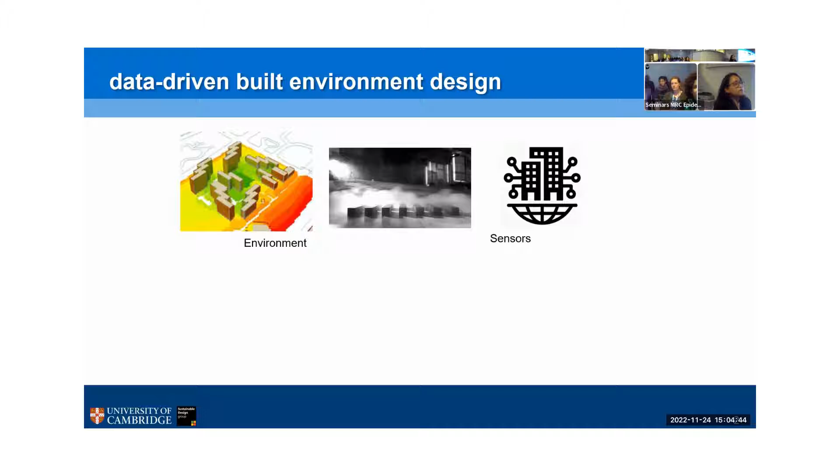You'll find me installing sensors across buildings, across built environments. I also do a lot of experimental modeling, and here you can see a little bit of airflow modeling happening. Apart from that, I also collect a lot of data from people as occupants about their practices, about their perceptions of health, about their well-being. I mainly work on health, like incidence of disease, rather than well-being as an indicator, but I'll also share a little bit of my work on that.

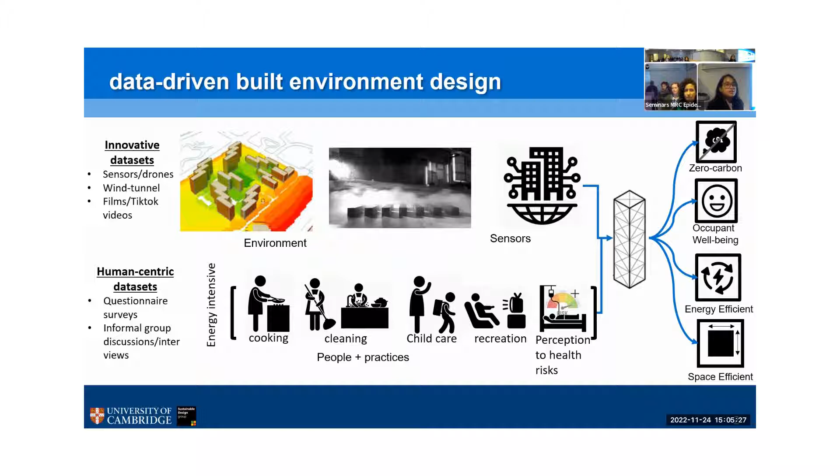So when I say I work with this, I combine all of these sorts of data to respond to our urgent goals of climate and energy efficiency that we require, as and when we are also responding to occupant well-being. When I talk about data, I basically use a whole lot of data which can be both quantitative and qualitative, and sometimes very innovative forms like films and TikTok videos are also part of my data set. That's where I try to convert design into a policy framework.

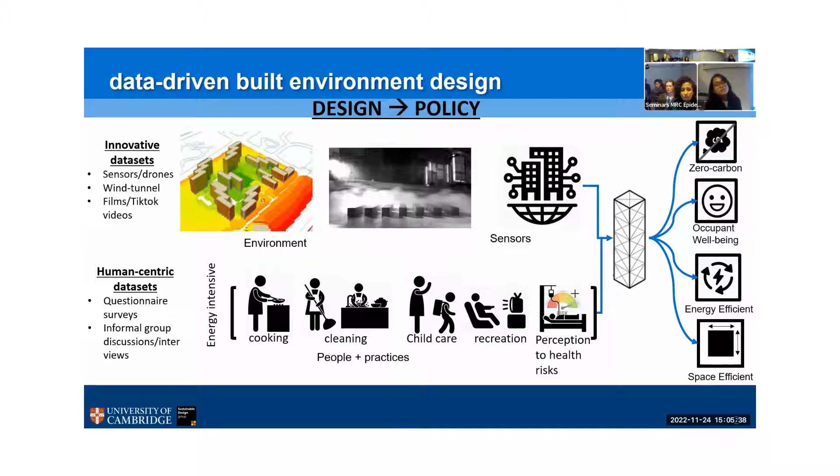And that brings me to my research group, the Sustainable Design Group, where we work on these four verticals of sustainable development goals: health, energy, a little bit on gender equality, and overall on the sustainability of built environments. And this is what our group's mission is.

We also have a few members here and a few joining online, where we work on the three nodes of the triangle. Most of our works have at least two of the nodes, where we combine these to develop sustainable design. And by sustainable, we also mean it's a healthy built environment that we are designing.

Given that I see design as a solution, most of the time when I look at data, I'm trying to look at outliers rather than the normal curve. By that, I basically want to see why an outlier exists in that particular pattern. So I'm more interested in looking at data which exists in isolation within a different pattern in a neighborhood.

Broadly, these are the keywords you'll find in all my publications. Talking about urbanization tensions, that's where the whole stem of sustainability research comes in. We need to have a huge amount of shelter and housing that will come up in the next decade, and a large amount of built environment will be coming up. As per the UN, 3 billion people will require affordable housing and a better built environment.

That has connotations to energy and health, but however, we can use these feedback loops to generate better design so that they have positive impacts on health.

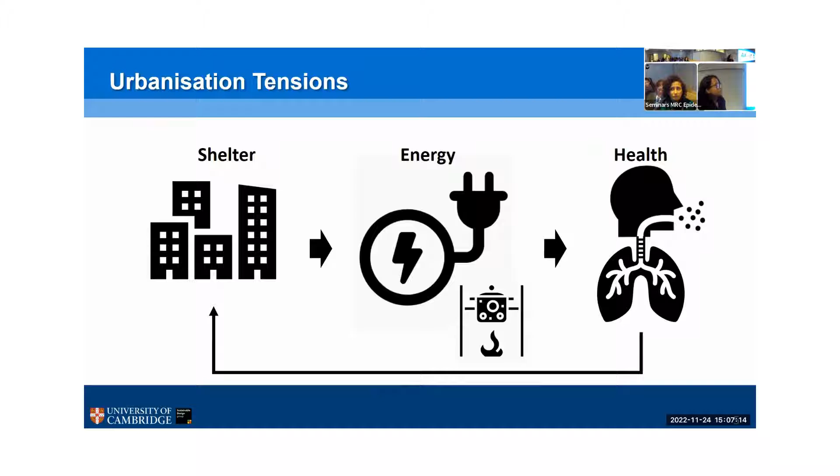So first, let's guess the distance between King's College and Fitzwilliams. How many of you think it's half a kilometer? Which branch of Fitzwilliams? One just down the road, yes, on Trumpington Street.

I launch the poll so people can vote and we'll be able to see. Once you can, I've launched the poll so you can now vote. If you think the distance to Fitzbillies is 0.5 kilometer, vote for it.

And we'll do it for up to more than at least another 15 seconds, and then we can stop it.

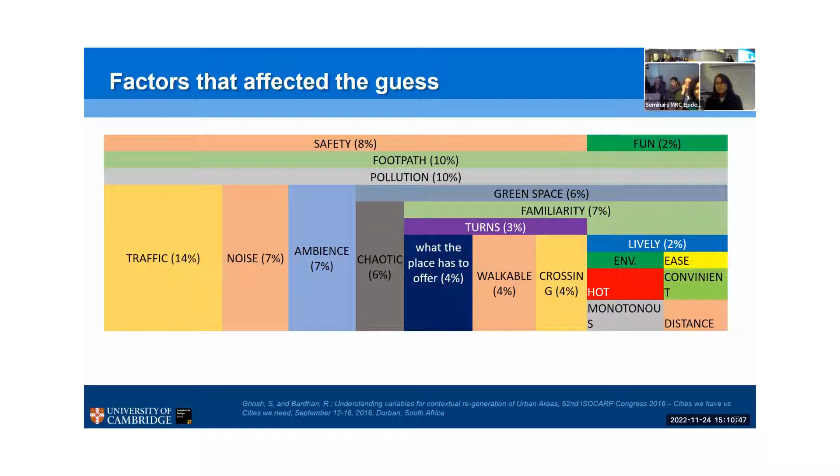And then we found out people actually guess the distance before they start walking or decide to walk on a particular street. And that estimation is not just a numerical estimation—they are estimating based on a wide range of variables that they take into account.

If I have to group them together, the majority, 41%, cited traffic-related variables, like it's very crowded or there's not a large amount of traffic. There's also a high percentage, nearly 49% of the population, who felt the variables were related to urban form—meaning the way the houses, buildings, roads, trees, or water bodies are laid out helps us decide where we will walk.

So whenever we are doing walkability research, we often lay a lot of emphasis on hard infrastructure and also on distance—so we say 30-minute cities, or 1 kilometer, 15-minute cities. But wherever we actually see where people choose to walk, it's probably not the distance, it's probably what's lying ahead.

So when we look at desirability to walk, we see these kinds of variables coming up a lot in our—I don't know, it's just, it's not working.

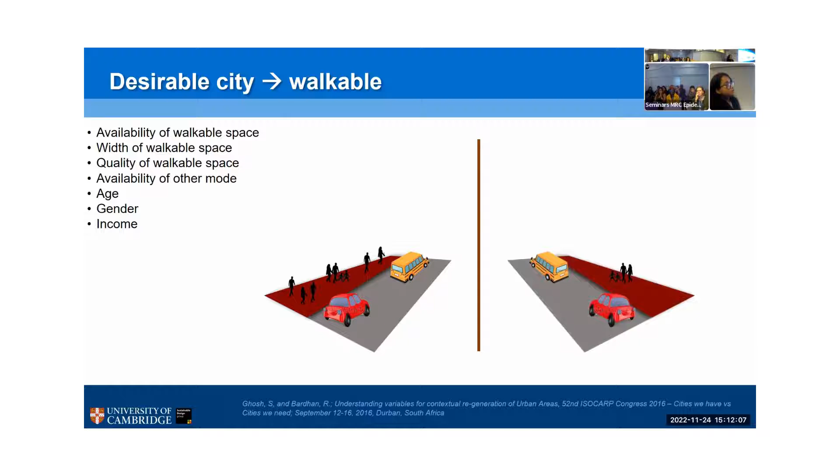No, it's not working. But however, imagine it's the same road with similar walkability, width of the walkable space, and quality of walkable space—we have two similar roads. However, what they differ in is what lies on that road: the physical infrastructure in terms of urban form, urban structures, or the buildings, if I may say.

So there is definitely climate, which plays a very important role in whether you decide to walk or not. The other part is culture—culturally, multiple cities have shown that it's the culture of walking that makes people choose to walk on a particular street or not.

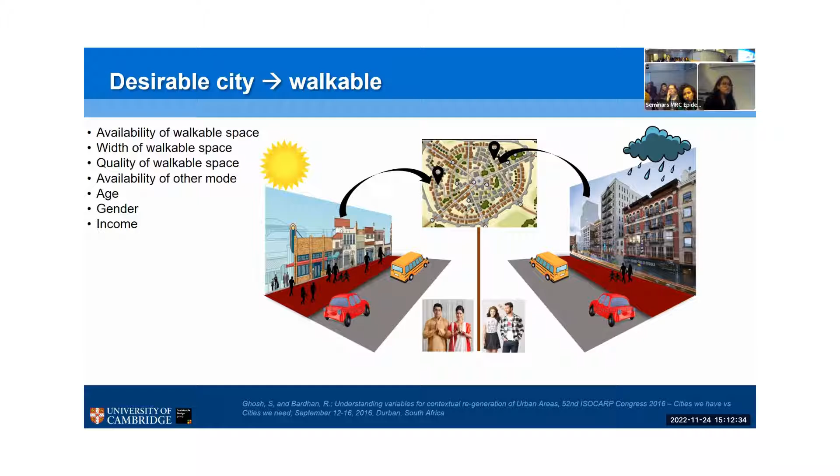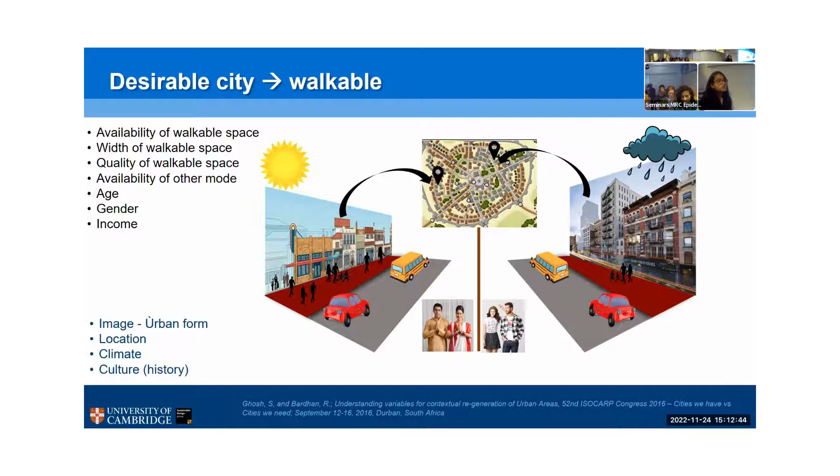And that's why we started looking at whether the image of a city, of a particular street, or the location, or the climate, or the culture, or history makes them walk more, or choose to walk more.

So what we did was we chose a city where 31% of the population actually walk to most of their destinations, and only 2% of the population use a car.

That kind of comes up with the question. So what we did was we selected 8 different places in the city with different sorts of walkability, in the sense that we started looking at very qualitative indicators. And we did a very mass survey.

That means a large number of people were actually walking. Then we looked at a range of these sort of intangible emotions that get evoked when people walk on the streets, and we found chaotic and boring.

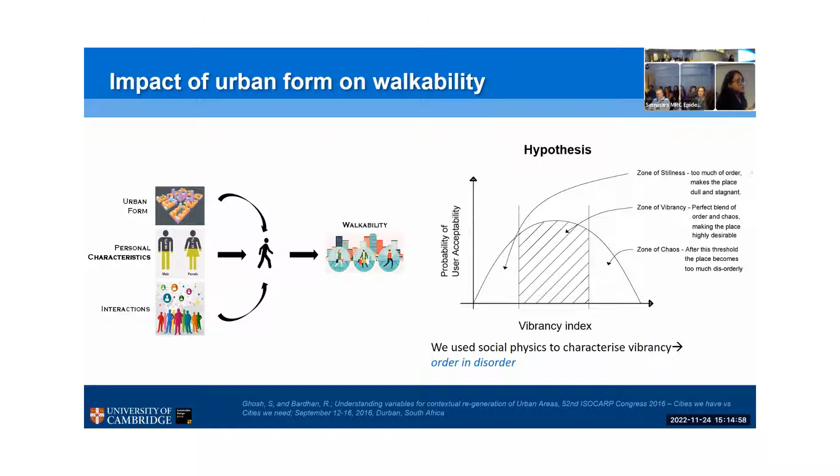It is directly borrowed from the Brownian motion theory, where we see how many people are actually walking on a street and how many interactions they're having. And we tested that using those 8 streets.

So we started—yeah, that's fine. So we tested that, and based on our videographic evidence and based on our attractive points—why people would walk on a street—in a moment we will see small little people coming out, which is the origin of the agents. Each of these buildings are attracting points: some are coffee shops, and so on. These attraction probabilities were derived from our survey data.

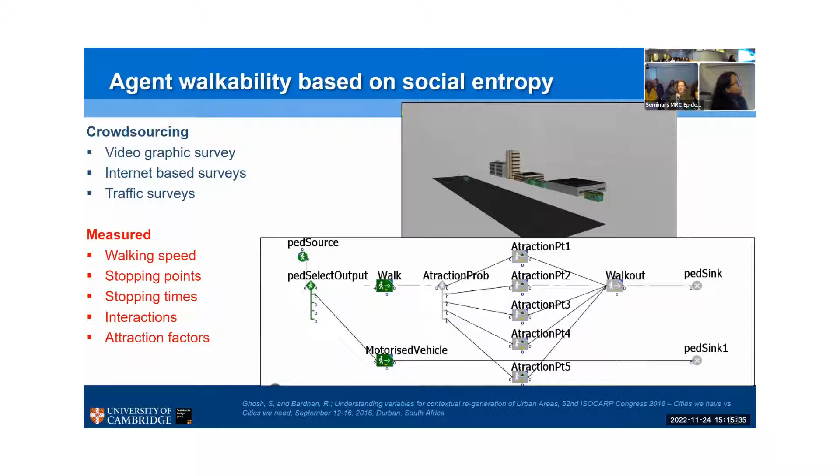And then we classified the streets based on their vibrancy and their probability of walking. We saw that it actually fits our model: there were some streets along these lines which were very still, where walkability was lower and the probability of walking also was relatively lower. Whereas in some streets, like Gariahat and Burrabazar which I showed, people did not find it pleasant to walk on those streets.

So it gives a notion that people walk on those streets because there is no availability of any other means of transport—if there was another option, they would have chosen the alternative. Whereas in Gariahat, people actually get down from their cars and walk on the streets because of the vibrancy, the amount of attraction points, or the diversity they get in those streets.

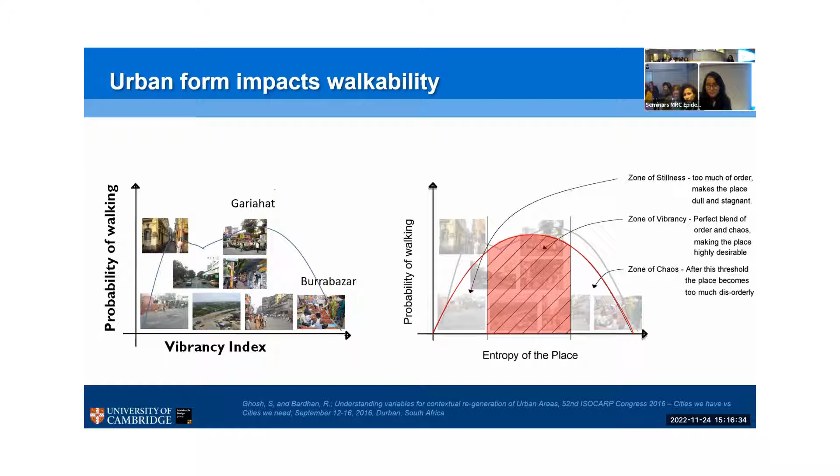That brings us to a question: in a setting where each of these urban forms has a different thermal signature, can we actually understand if heat affects their walkability? So we started looking at urban form from a very broad perspective, from a satellite image, and we see in a city where 3 different typologies of built forms are very closely associated to each other.

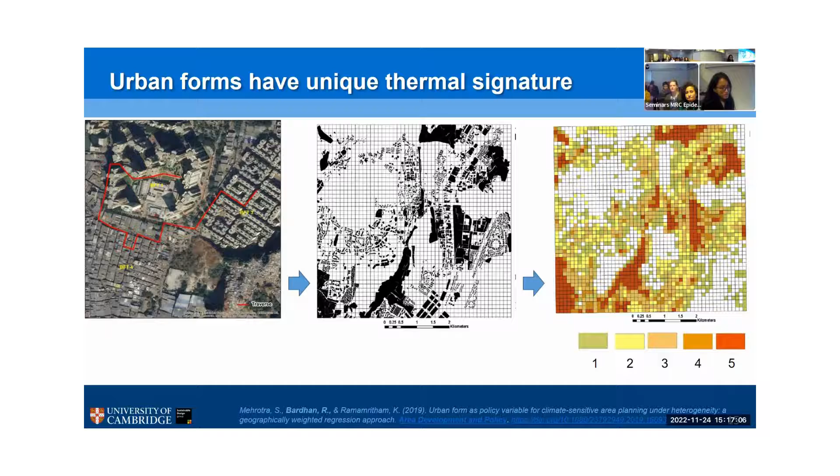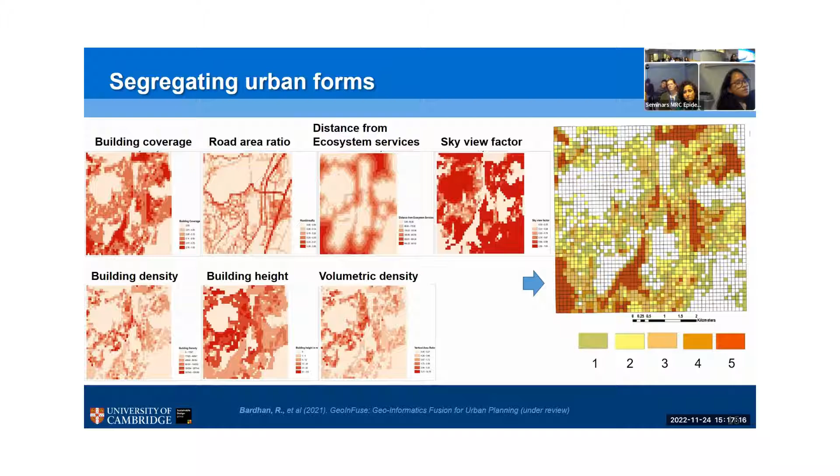Our endeavor was to find out the unique heat signatures of these 3 places. That brought us to develop a multi-metric statistical analysis, which we developed so we could significantly segregate the urban forms based on their heat signatures. We did that using machine learning—we developed a machine learning framework where we could use all of this.

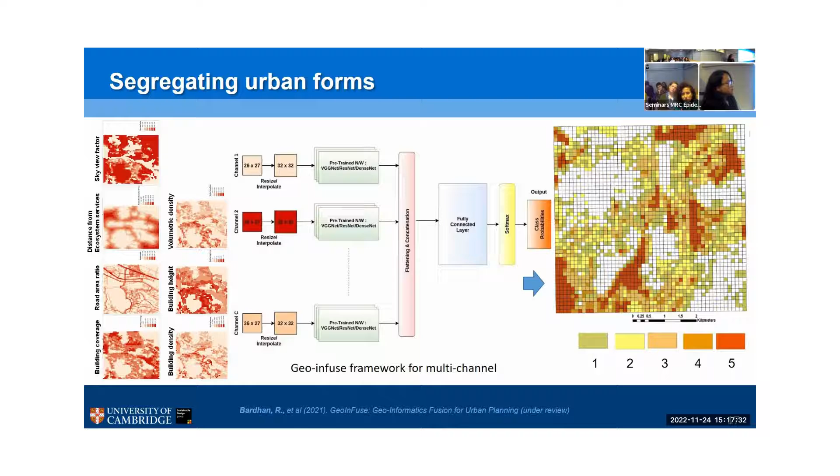Today we had 7 of these channels of information. You can actually add more, and we could successfully segregate these forms. These forms had very different signatures of temperature, and I will show you how they look like.

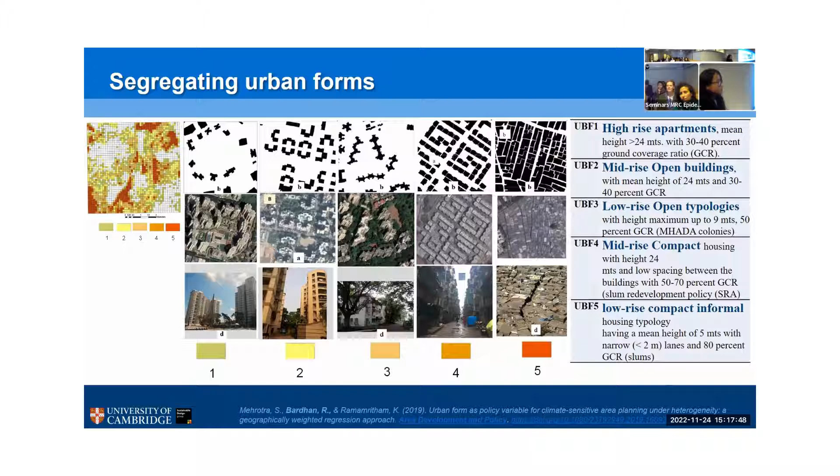That brings us—so we installed sensors, and that brought us to a very large data set. We installed sensors for a longer time, correcting for seasonal differences and local weather conditions, to get the microclimate. Our endeavor was to find out if there is a particular form in a city that allows it to cool down faster, because every form is going to heat up—it's a city where a lot of construction is going on.

So is there a form which cools down faster? Any point below the red line is thermally comfortable, whereas any point above is thermally uncomfortable. We wanted to see if below the red line the curve has a larger area or is longer. You see a particular form keeps cool from 6 o'clock to 10 o'clock in the morning, which is the top form, whereas the other form had a cooling effect for a shorter duration. That means it's actually warmer during the day to walk on those streets.

And when we related this data to our walkability, we found out that the particular form which cools down faster had more people registering to walk or willing to walk on the streets.

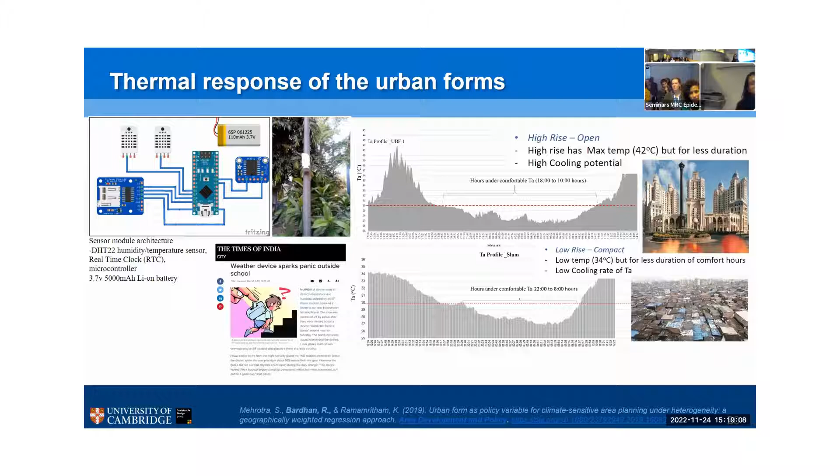This is just a snapshot of what people thought we were installing bombs in the city, and we got featured in the news.

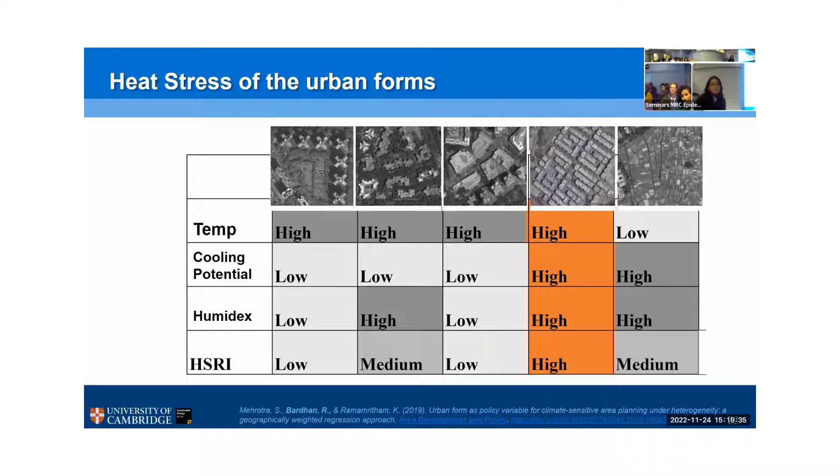So when we looked at the temperature, the cooling potential on the humidex, there was one particular form that was coming up, emerging quite significantly, which had very high temperature, the highest, high cooling potential, very high humidex, and a very, very high overall heat risk index.

Why does this become important? Because moving down the line, a large number of cities will have these sorts of forms, which we just saw had a high heat stress index, because they are the affordable housing coming up across the global south. And that's where the future of urbanites will be living.

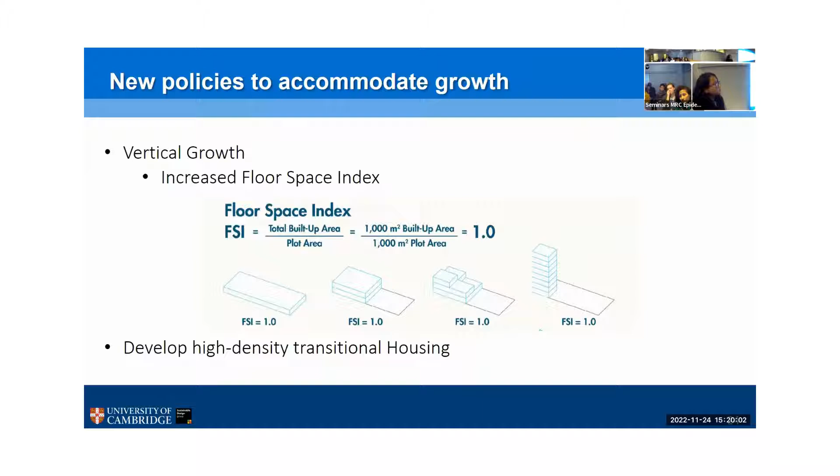This is how it looks like. So they are going to replace all these high heat risk spaces with the highest heat risk space we just saw. This is how it looks. Throughout the city, you will have these sorts of built environments coming up in extreme numbers, nearly to the extent that more than 50% of the population is currently or will be living in these sorts of spaces.

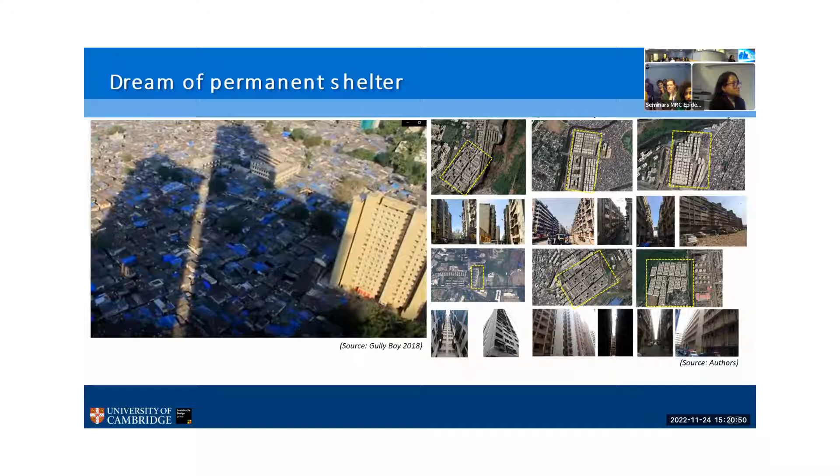That means if these houses are not actually responding to the climate burden, they have a pathway towards health impacts. And how does this work?

It started in 1995, where they cleared a part of the slum area and then started building. If I show you in a picture, this was 2018, where you see the small little building in the middle, that's where people will be transported before the tall tower in the back is constructed.

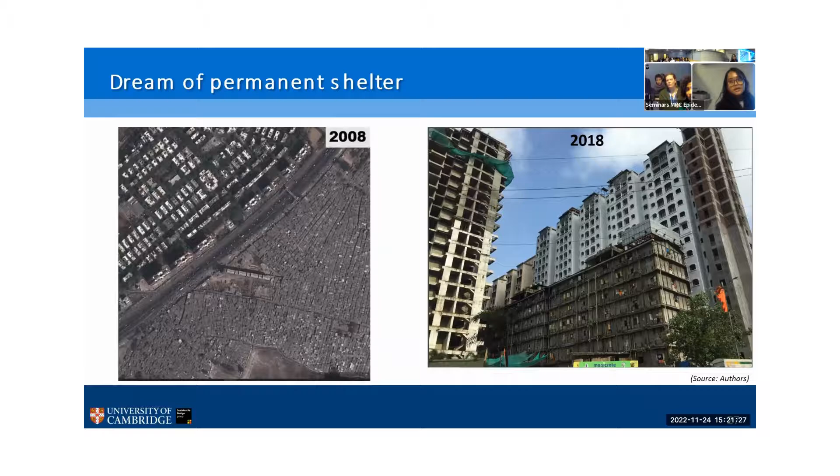Once that is constructed, the rest of the land that gets freed will be used by the developer to build extremely high-end residential buildings, with prices comparable to London or New York, in Mumbai. So it's bought by a very rich population. That's how they are cross-subsidizing and building these sorts of houses.

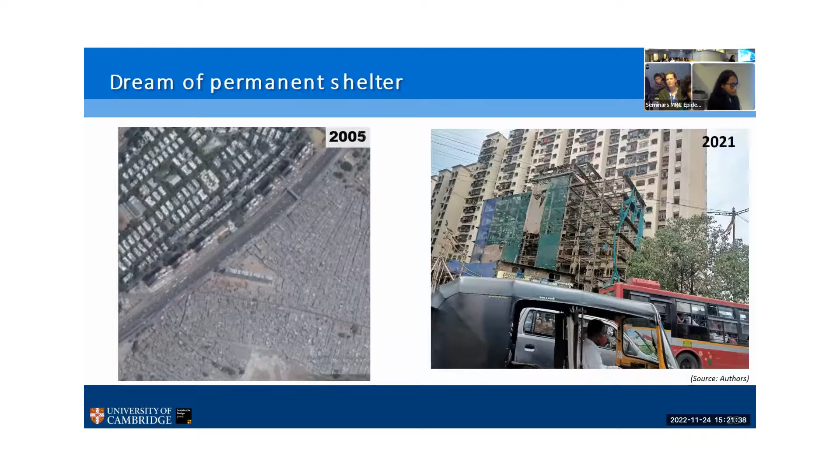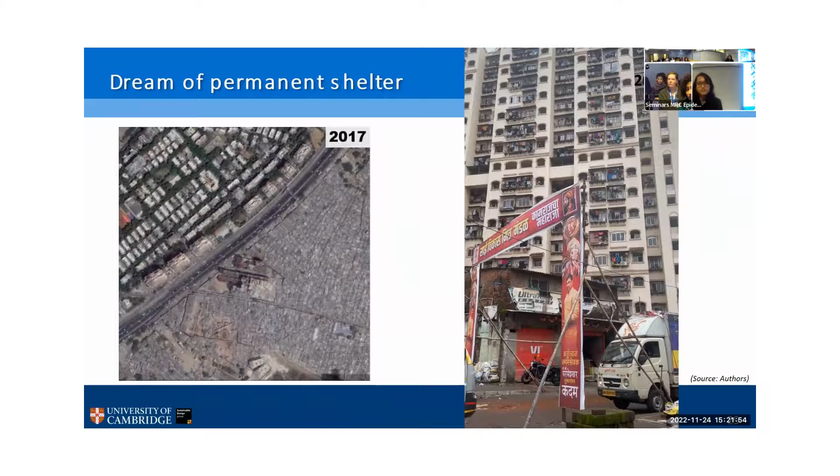That brings us to the question. This is how it looked in 2021. And this year, in August, I went, and this is how it looks now. The high-end residential is built, the people have actually moved in, and you can see the small little transit building is now dismantled, and people have started living in these houses. We started trying to uncover what is the health impact of living in these sorts of houses.

This is a new policy that has come up, which is being copied across the global south because of its huge potential to close the housing deficit. What they are doing is, in a normal building code, they allow for a 45-degree angle, meaning no building should cross the 45-degree line. Whereas for a high-rise building, the maximum you can go is a 63.5-degree line. Beyond that, the law doesn't allow it.

For these special buildings, they have a special code, which means they have not mentioned any sort of height or angle restriction. They have said the distance between the buildings has to be minimum 3 meters, so there's no limit on what should be the maximum. But when you give a developer a minimum guideline, of course the person is following the minimum guideline.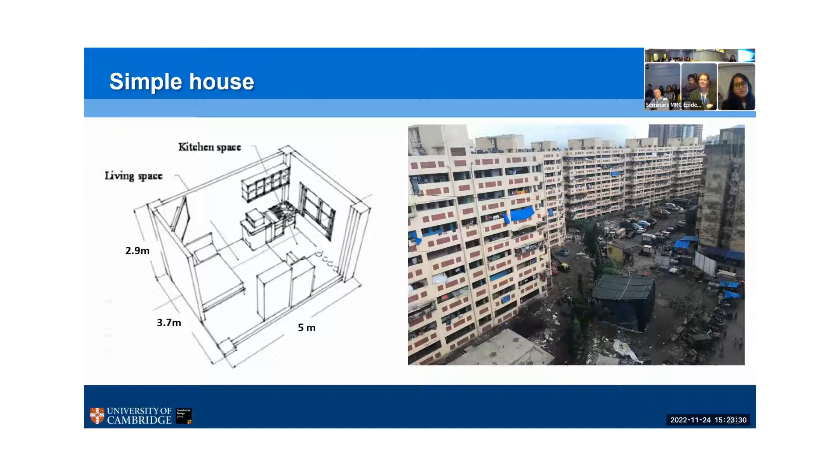This is how it looks like in reality during a monsoon season. These are just units stacked side by side. That brought us to understanding what the inside and the outside actually look like.

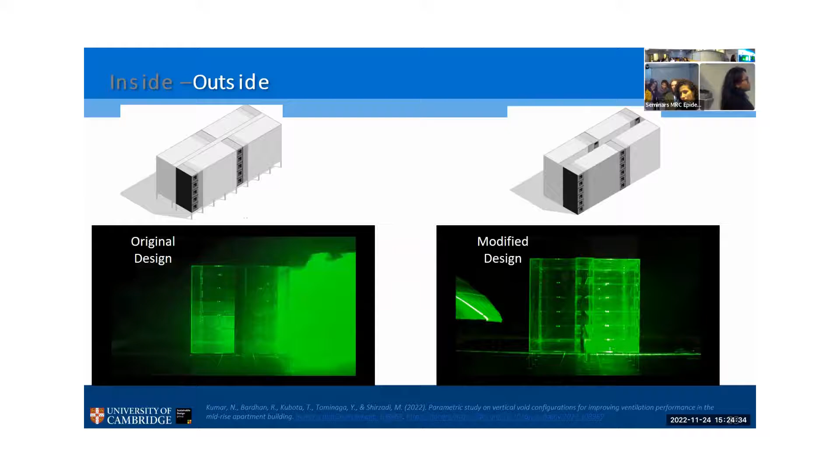So what we started with—this was the original design. When we started looking at it, I'll show you—it's not a storm blowing, it's just a video where the speed was increased. So when air flows, our endeavor is to bring in natural ventilation on the leeward side, apart from the windward side, because the windward side is already getting ventilation. You will see all these units have the ventilation required, whereas these units do not get any ventilation. So we changed that strategy.

So the image got reversed—it should be this. But what we did was we introduced a sort of fin here, which basically drives the air up through this and then turns it around. In that image, you're not seeing any ventilation on the windward side because we closed the window there, but if you open the window, you'll get the ventilation. So both units started getting ventilation.

One other problem we are now trying to solve: because the air travels through the atrium and then goes in, if the atrium is contaminated, you're going to breathe contaminated air. So for the natural ventilation, we are trying to solve that part now.

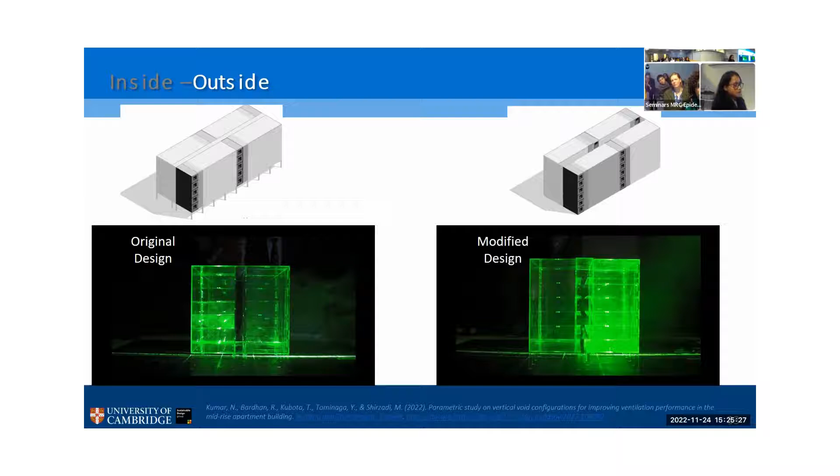At this point, the problem also arises of how these buildings are actually looking in reality, and this is how the windows look. When we talk to the architect, they say they are providing a 1 meter by 1 meter window, whereas in reality, because of the lack of space and the huge family sizes, everything overflows into the corridor.

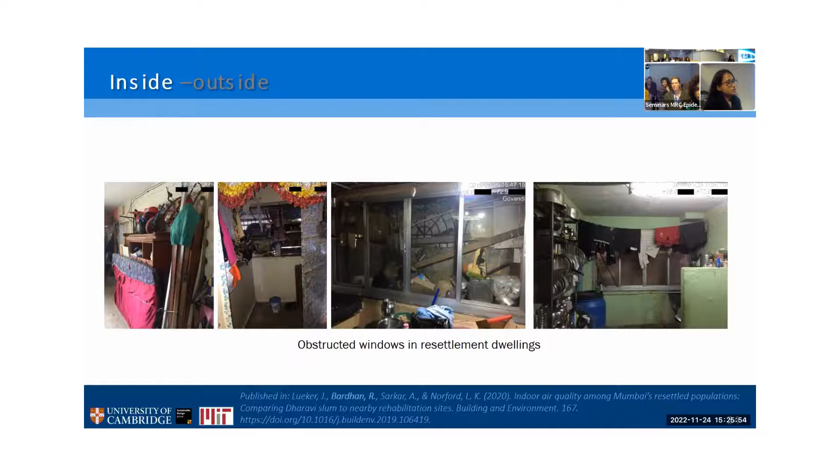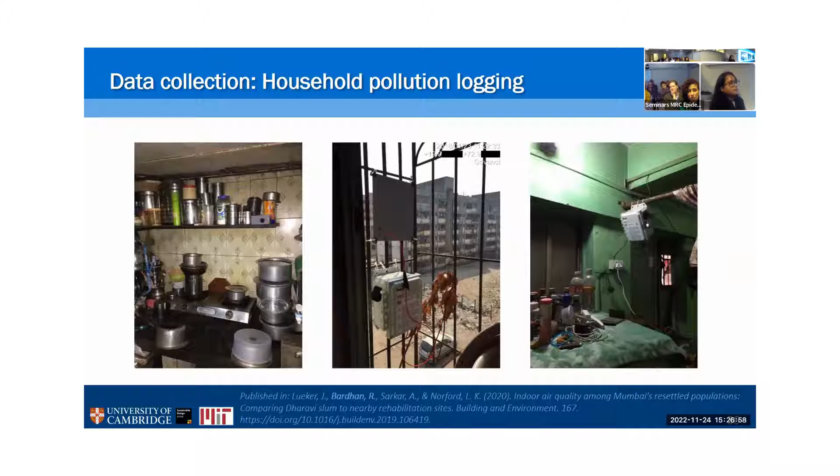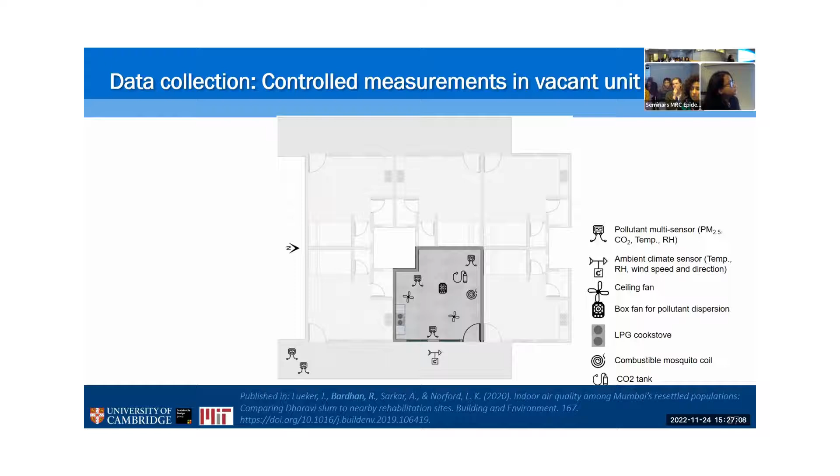However, we also later got the data for tuberculosis, and I'll share that data in a minute. So what we did—we rented one of these apartments, set it up, got all the data of how they live in these houses, and started doing a kind of research on these sort of houses. So you can see this is our kitchen set, and this is one of me trying to cook and emulate their lives.

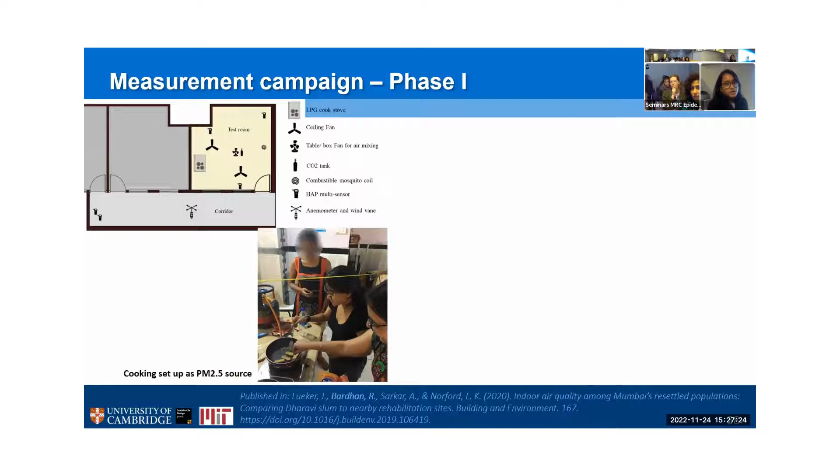So we reached there and conducted these experiments for 5 days a week, and got the pollution data. The World Health Organization says that the kitchen area, or the area where you're cooking, should have a limit of around 25 micrograms per cubic meter.

Whereas for India, they have changed it to a higher limit, which is 40. But when we looked at the H type design, it was on an ambient level of 357, because outdoor pollution is also quite high in these cities.

But when they cook using LPG or kerosene or even dirtier fuels, the total concentration is around 2400 or even more. So we basically converted this into how many hours it takes to refresh the air.

So if I can give you a concept, the age of the air in a room is almost around 2.5 hours. For one exchange of fresh air, it takes around 2.5 hours. And most of the time, the women are actually closing their windows while they're cooking because the windows open to a public thoroughfare. So that's the limit they are getting, it takes around 2.5 hours.

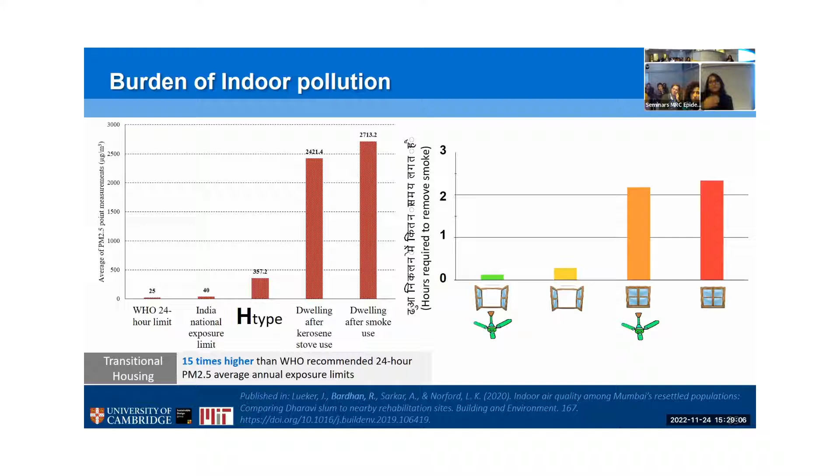So what is the connotation of this 2.5 hours? Because they cook 4 times a day, and each cooking time is 1.5 hours, by the time they stop cooking and start again, the pollution level doesn't go down. So if you divide it into 4 times a day, that means on a constant level, they are at a very high level of pollution.

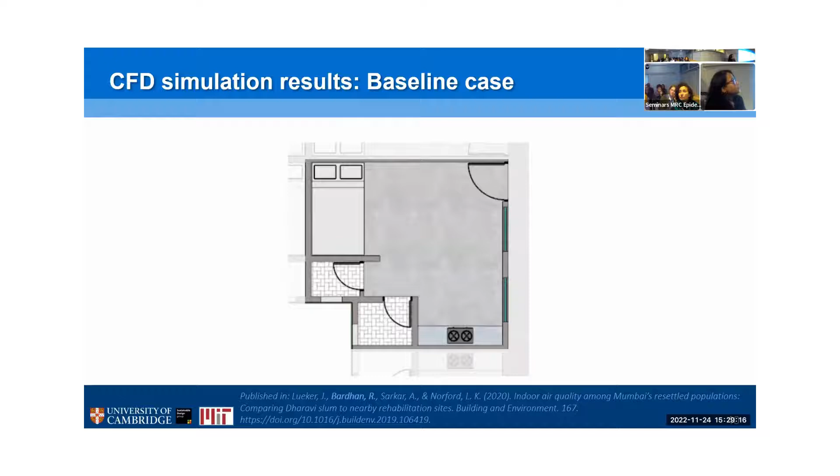That brings me to this: we started looking at simulations of how we can change this in the resource-constrained setting. So we looked at the baseline and started modeling when they cook, what the total pollution released is, and then looked at various strategies.

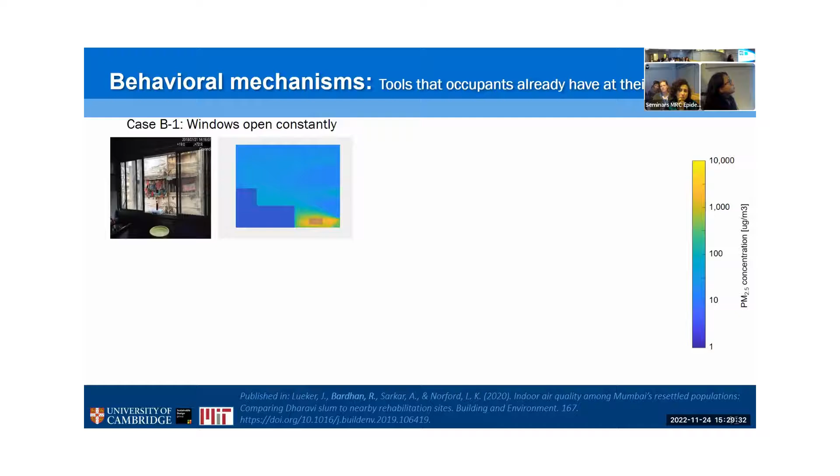The first strategies are not costly. They just open the window constantly, not just during cooking. The second strategy was to open only during cooking. The third strategy was to relocate the stove towards the window.

So currently the stove is here and the windows are here. If you relocate, what happens? And then we also eliminated all sorts of pollution sources like incense sticks or even mosquito repellent coils.

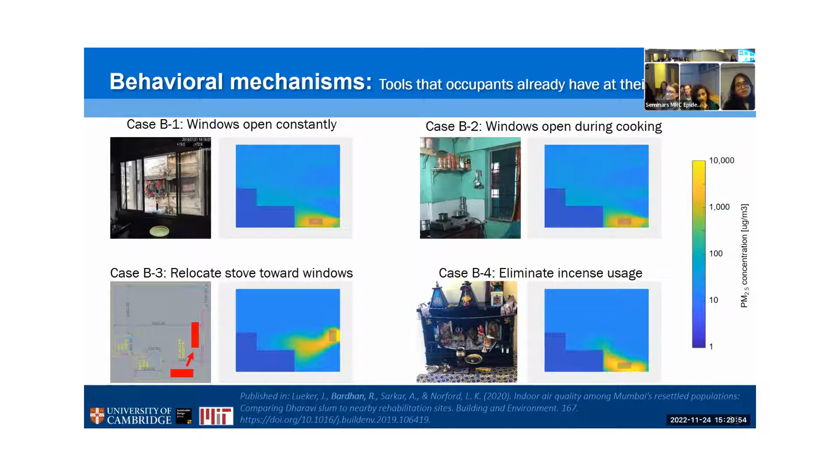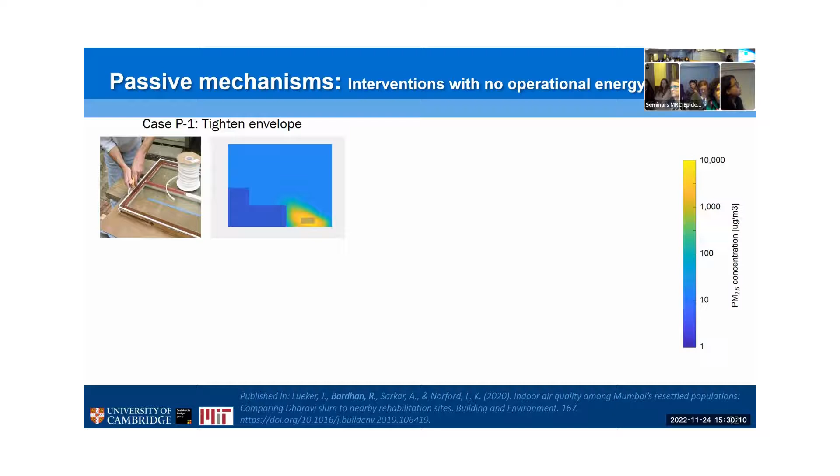And then we did more simulations on understanding what sort of interventions require a bit of operational energy, which require no operational energy, but structural interventions like tightening the envelope so that outdoor pollution doesn't interfere with the indoor, and some green sinks so that the pollution is trapped and the outdoor doesn't come in.

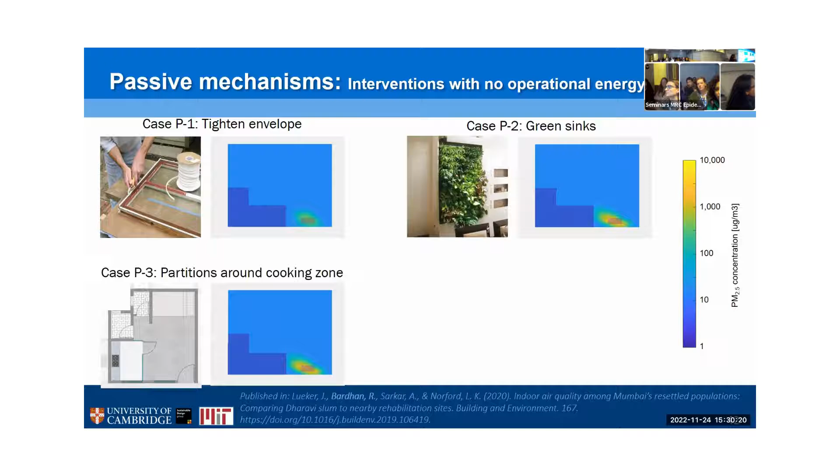We also suggested a partition wall. This is a small little partition wall that you can see here near the kitchen, so that the pollution is restricted within the kitchen area and not spread throughout the multipurpose room where the rest of the members are also living.

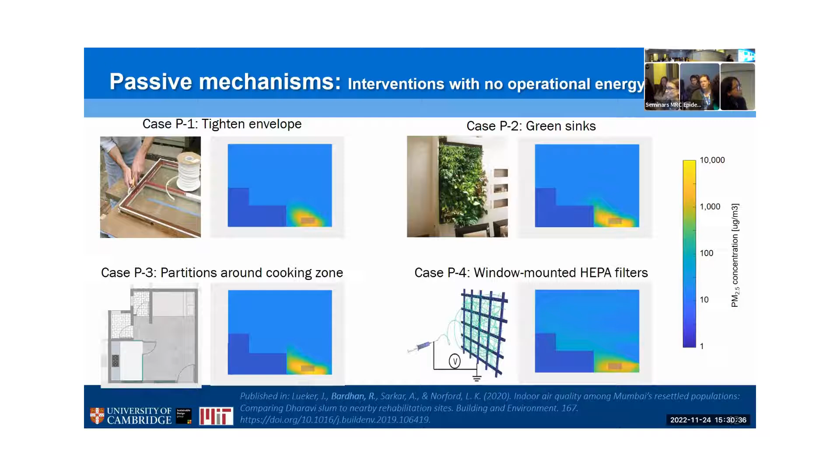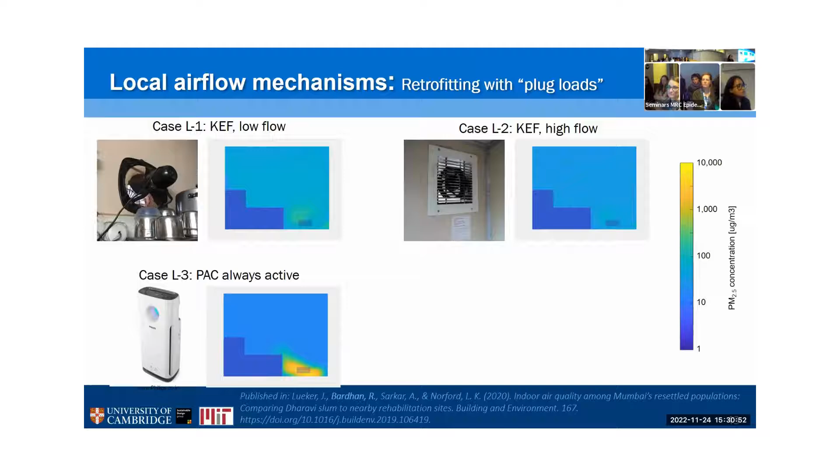We tried with HEPA filters, tried with extract fans. So we said let's just install an extract fan and see how it performs. We also tried some very high-end devices, which aren't possible for these houses, but we still wanted to see if the technology provides benefits. So how does it look?

That gave us quite a lot of hope, because we could just go to the government and say, this is working. For this project we could go back and ask the developer to provide an extract fan. It's a very simple solution, and it doesn't cost the developer at all.

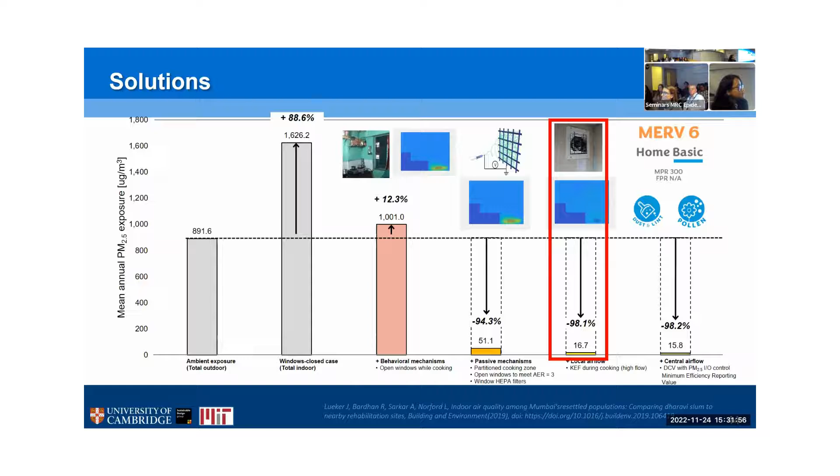However, currently some of the households have installed this, and this is how it looks. The 1 meter by 1 meter window, which the architect always brags about, only works if it's just an opening.

But when you put a standardized window, which is 50% openable—a sliding window—you compromise 50% of the ventilation there. Because the extract fan needs a pressure difference to work, otherwise it's going to bring air in instead of throwing it out, people have to keep all the windows closed so that there's a good pressure difference between indoor and outdoor, and then it kind of comes out. So this doesn't work in the current context.

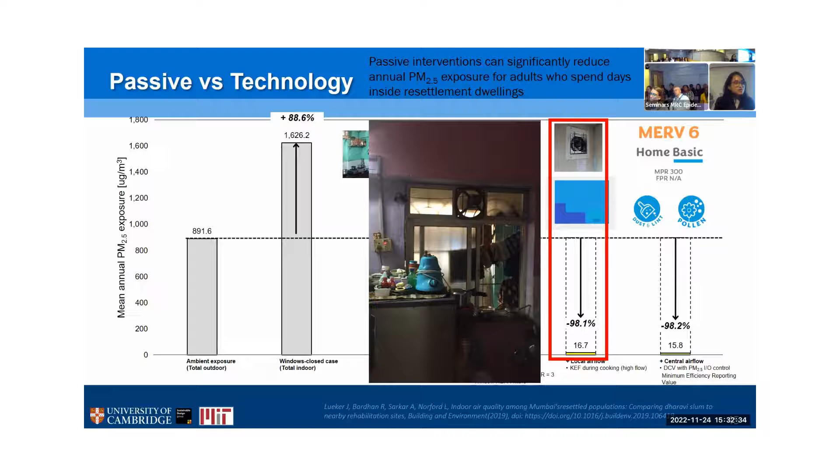So we gave this as a solution to the policymaker. Then I was very interested to understand what the health impacts are, because I'm not a doctor, and that doesn't fall under my remit.

So we went and asked the population, how many times do you visit a doctor? It's a very sensible question to ask in India, because people do not go to a doctor until they feel they're going to die—the do-nothing scenario is very high. This is mainly because there is no government support for medical health and no insurance from the national insurance.

So people generally do not visit a doctor. The only thing that changed for this population was they moved from the slums to these sort of houses. Nothing else changed—their access to healthcare didn't change, the number of healthcare facilities didn't change, their cost of living and subsistence amount didn't change, so their income remains the same. So asking how many times they visited the doctor was a good question, just to understand whether they were falling sick or not.

We found out that prior to moving here, in a 6-member family, at least one member would visit a doctor in 3 months. Whereas after they moved in, in 3 months at least every member of the family had actually visited a doctor. So it's almost 3 times the visits to a doctor, and that's what we are also seeing.

We also wanted to see the asymmetry in where they're living—is the concentration of doctor visits highest on the ground floor, or the top floor, or is there no asymmetry at all? We did find out, so if you see...

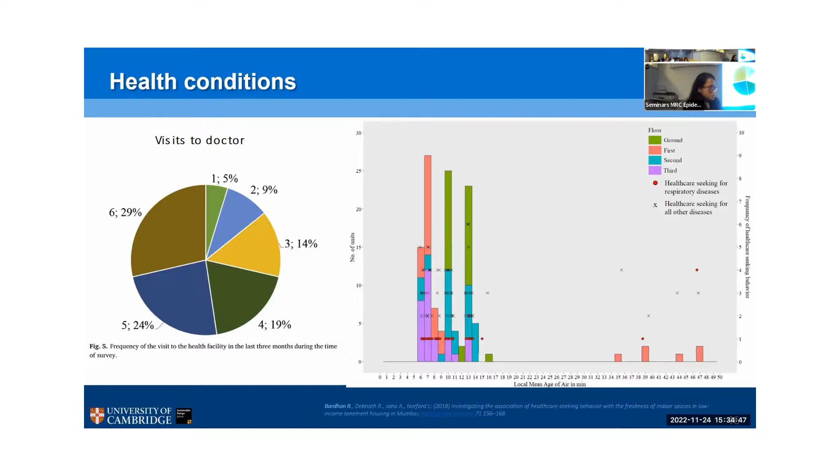The x-axis is the mean age of the air—how stale the air is. The longer it is, the staler it is. The colors show where the floor is, and the cross points show how many times each of these units visited a doctor. It was very clear from this that the ground floor, and to some extent some units on the first floor, were actually visiting the doctor more times than people living on the upper floors, which is also commonsensical given that the distance between the buildings is so small.

That's when I got to work with a very large tuberculosis dataset of all the people living in these X type, I type, and H type housing. The total sample size was also very high because there are around 5,000 housing units in each of these types. So we had the whole dataset of the number of people actually visiting the doctors, and this becomes very, very important.

We wanted to see whether they developed tuberculosis after they came here, or already had tuberculosis before. First, looking at the number of incidences in the I type, H type, and X type, we saw that X and H type were reporting 10% of the population with incidence of tuberculosis, whereas in the I type it was only 1%.

This is important because tuberculosis is treated by the government, and there is regular surveillance by health workers at each of these houses—they go and check whether there's some marker for tuberculosis there. So the number of reporting is not really low in that sense. So if X type was reporting more than H and I type, it means there is actually higher incidence.

We also wanted to see whether the incidence was among people who had tuberculosis before they moved in or after. When we looked at the X type, most of the population were reporting tuberculosis within 6 months to 1 year after they moved in.

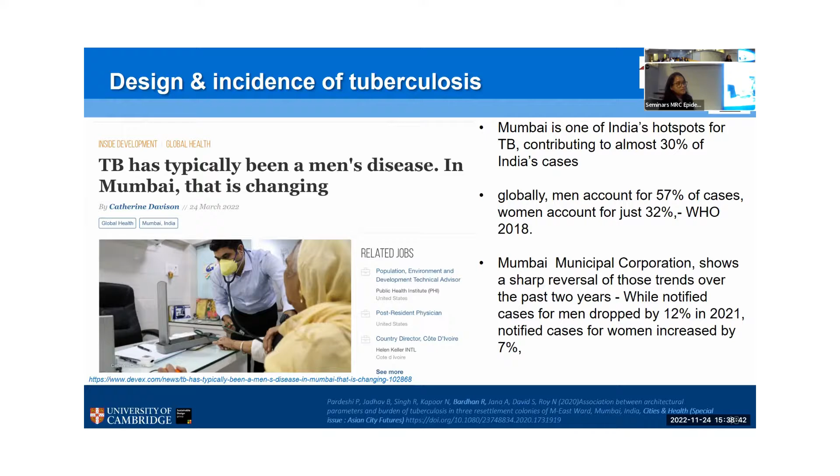Men dropped by 12% in 2021, while notified cases for women increased by 7%. In Mumbai, where these sorts of houses are coming up and more than 50% of the population lives in them, they account for 30% of India's total TB cases—quite high even in raw numbers. If this is the future, where a larger population will get the disease, it's a matter of concern.

That brings me to the conclusion. We found that built environment design can modify health risk factors. Health outcomes can be mitigated or adapted through design. Technological solutions are needed and should be enforced through design standards. Finally, socio-cultural norms should be incorporated—like women not opening their windows during cooking, which is a norm that has to be broken through feedback surveys.

So as I was saying, socio-cultural norms should be incorporated into health outcome assessments and policy design. And finally, if nothing works, I think less is always more—just installing an extract fan actually solved the problem. Since I show these slides to the government, I also add: finally, if nothing works, just pray.